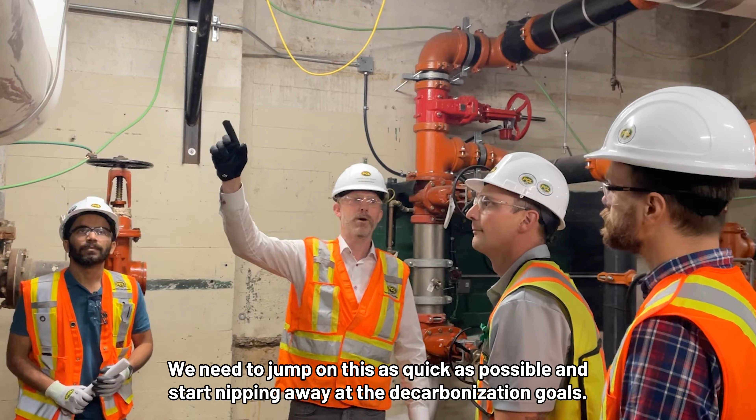The scale of the challenge is massive. There's hundreds of millions of square feet that need to be retrofitted, something like 482,000 commercial buildings across Canada. When you break that down into number of projects per year, it's a staggering number. So time is of the essence — we need to jump on this as quick as possible and start nipping away at the decarbonization goals. You heard that right, 482,000 buildings.

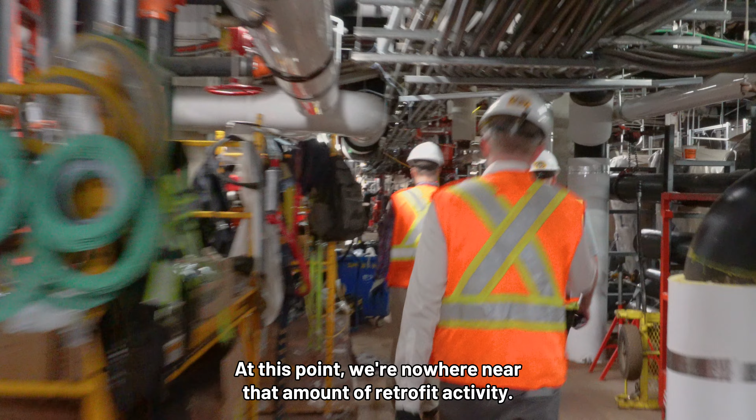The federal government estimates that this will require an investment of around $20 to $32 billion annually. At this point, we're nowhere near that amount of retrofit activity, so it's a huge challenge. But it's also an opportunity.

The Green Building Council's report estimates that large building retrofits can reduce emissions from the sector by up to 51%, or 21 million tons of carbon per year. And the retrofits are not only good for the environment, they're good business because they can improve a building's market value and the rents it can command. Buildings that have been retrofitted are functionally better than those that have not, and their values increase much the same way improvements to your home increase its value.

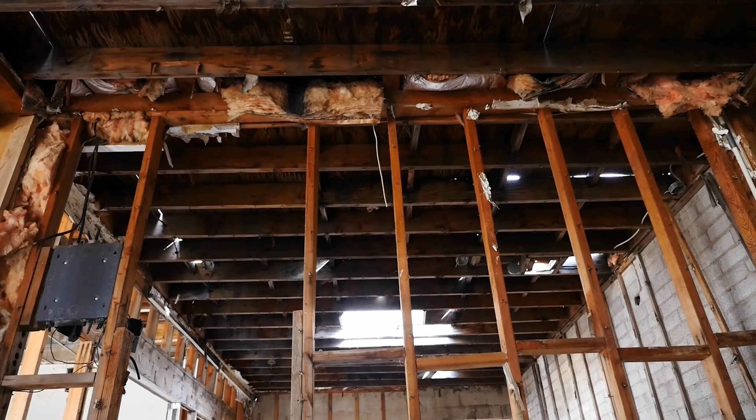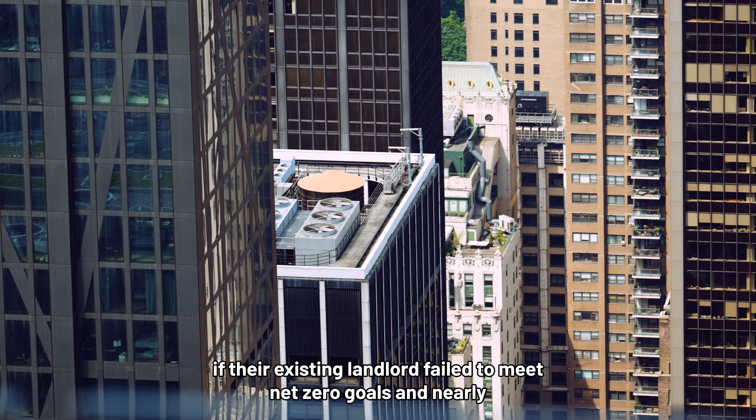Evidence suggests that so-called brown discounts on older buildings that have not been retrofitted can be 30% or higher, negatively impacting a real estate portfolio. And tenants are demanding sustainable buildings. A 2023 report from Deloitte identified sustainability, or lack thereof, as a deal-breaking issue for many tenants. 58% said they would look for alternative leases if their existing landlord failed to meet net zero goals, and nearly half said they would look for early lease termination in that scenario.

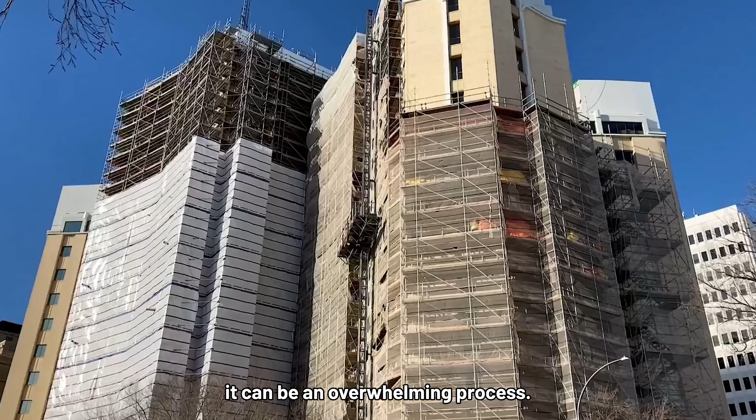Even though retrofitting your building to make it more sustainable is a smart business move, it can be an overwhelming process. This is where PCL Construction brings its greatest value to clients. Our experience with retrofits, combined with our experience with estimating, budgeting, scheduling, logistics, and project delivery, provides returns.

If we can get in and understand what's really driving the client to make these changes, we can provide certainly the best value. We can do some pro forma analysis, building condition assessment analysis, and some market data analysis. All these things will help the client make the right choice in an effort to return the best possible result for the decarbonization project.

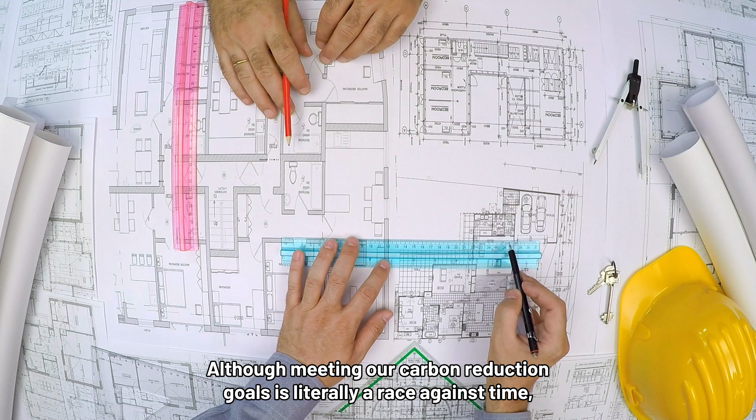Although meeting our carbon reduction goals is literally a race against time, trying to figure out how to do so can be a daunting task. Despite the difficult road ahead, some companies are rising to the challenge and leading the way.

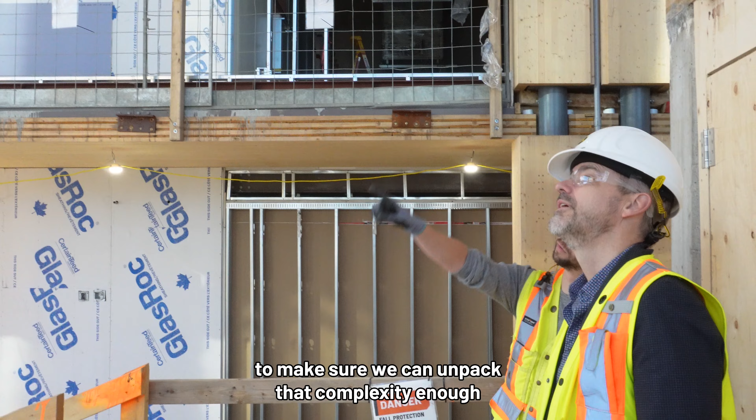Our product, Buildings, has kept on evolving, and PCL has, I think quite wisely, put people in place in-house to make sure we can unpack that complexity enough to provide accurate insight to our clients. And that's where our strength is. We have our subject matter experts under structure, building envelope, building systems, elevator. These people give us the insights to make sure the complexities are actually talked about at the table.

They're baked into the schedule. The superintendents know what needs to be done. The suppliers know what they need to provide.

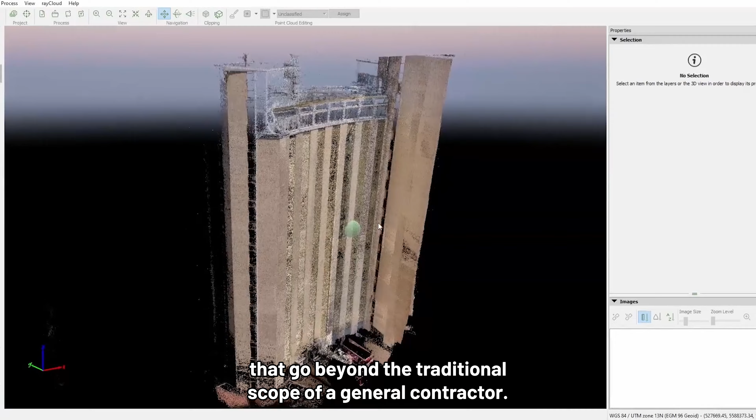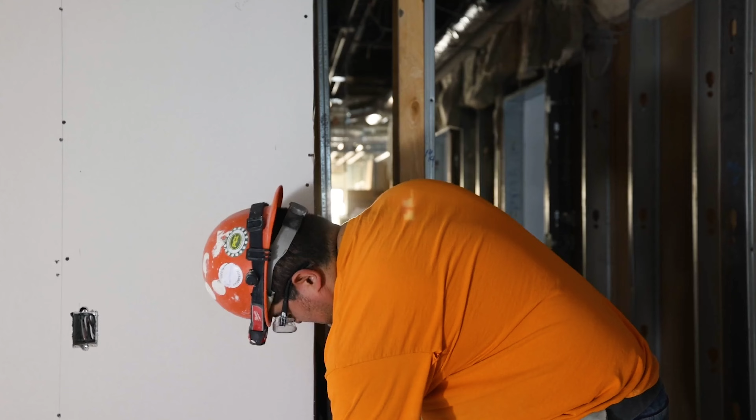PCL provides services that go beyond the traditional scope of a general contractor. These include building condition assessments, the gathering and analysis of market data, and robust costed options as clients enter the project planning phase. We also bring a wealth of experienced partners to the table.

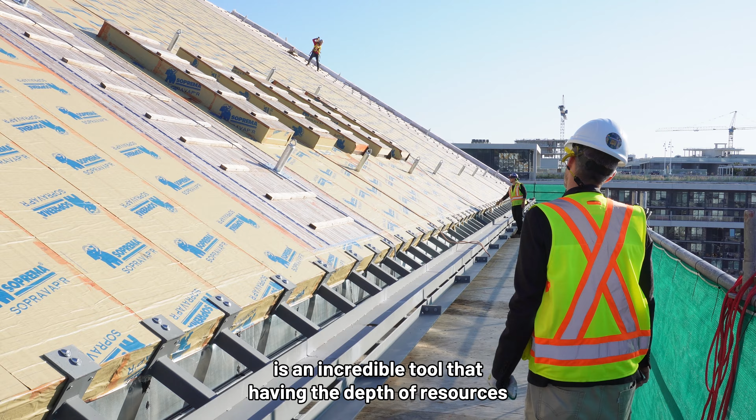We talked about our early involvement using our in-house experts at the onset of a project to collaborate and find tangible solutions through the construction. But we also rely on our trade partners. The wealth of knowledge that industry brings is an incredible tool — having the depth of resources and the depth of relationship that we have in the industry is something that we tap into regularly for solutions to these types of challenges.

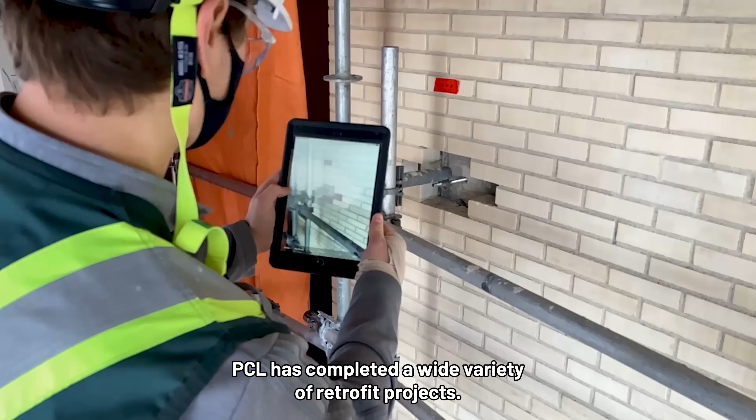PCL has completed a wide variety of retrofit projects. One example is the HSBC Tower in downtown Edmonton, where we helped the client transition from a Class C to a Class AA building by replacing the curtain wall with a triple glaze system and upgrading mechanical components. The owner ended up with an asset that functioned better and was worth more.

In Calgary, we worked with a client to complete an office to residential conversion, turning an old office tower into 82 affordable homes and upgrading its building systems and envelope. And in Hamilton, we completed the largest certified residential retrofit project in the world with the 18-story Ken Soble Tower. We pulled out 94% of the annual energy on an affordable housing complex for seniors.

That's about as meaningful as a project can be in terms of changing the built environment for our cities. When these sort of older buildings that are being used for affordable housing can really make a better place to live and really uplift the community as well.

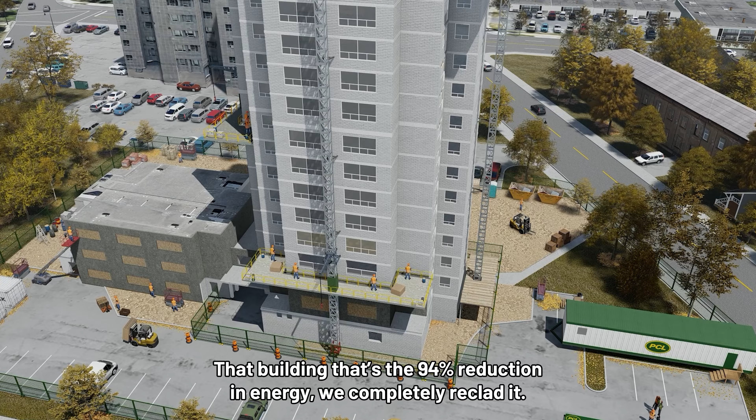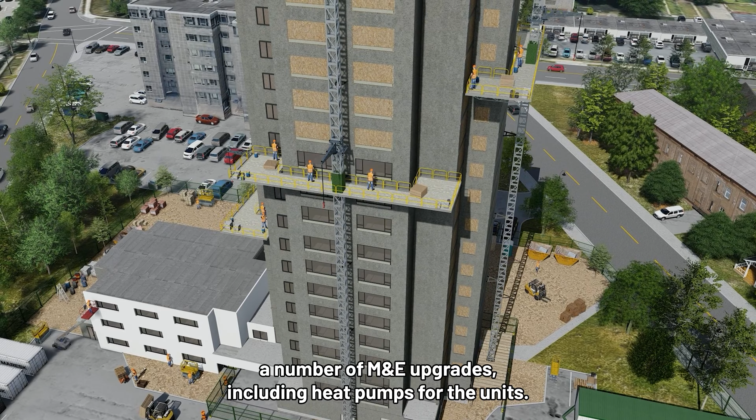That building, that's a 94% reduction in energy. We completely reclad it. We got rid of the balconies, which were giving off a great deal of heat through the concrete connection to the core. A number of M&E upgrades, including heat pumps for the units. Just a truly magnificent upgrade that we're still monitoring to this day.

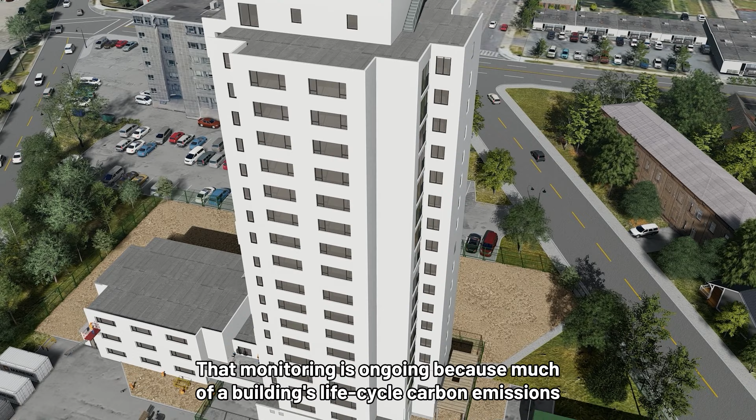That monitoring is ongoing because much of a building's life cycle carbon emissions will come during the decades that it is occupied and in operation. Using a suite of measuring devices, owners and operators can now know everything their project is doing and react as necessary. This has made the handoff portion of every project more important than ever.

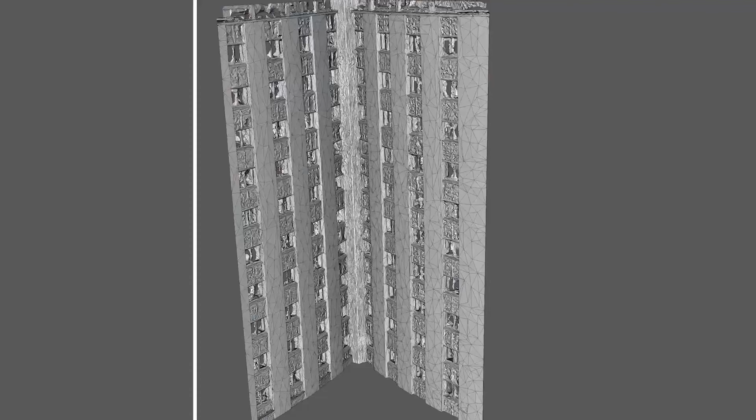We want to be there for the commissioning, and importantly, we want to be there for the handoff to the building operations and maintenance staff that will run the building in the future to try to achieve those goals of decarbonization and reduce the energy consumption of the building.

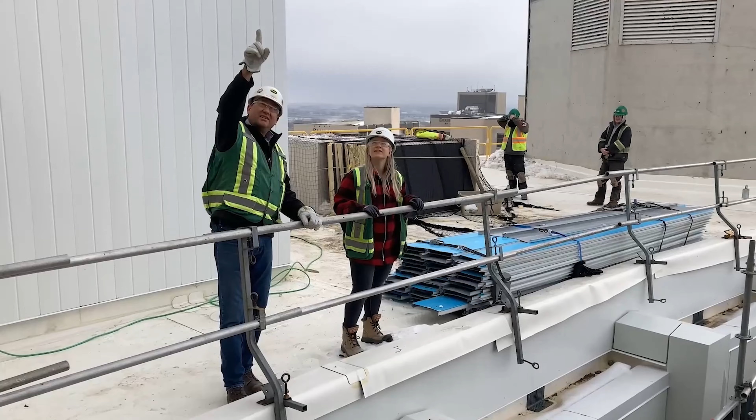Meeting the new demand for retrofits and decarbonization is going to require new perspectives and strategies if we're going to meet targets for carbon reduction. But through partnerships, investments in technology, and proven experience, PCL is helping to chart the road to net zero.